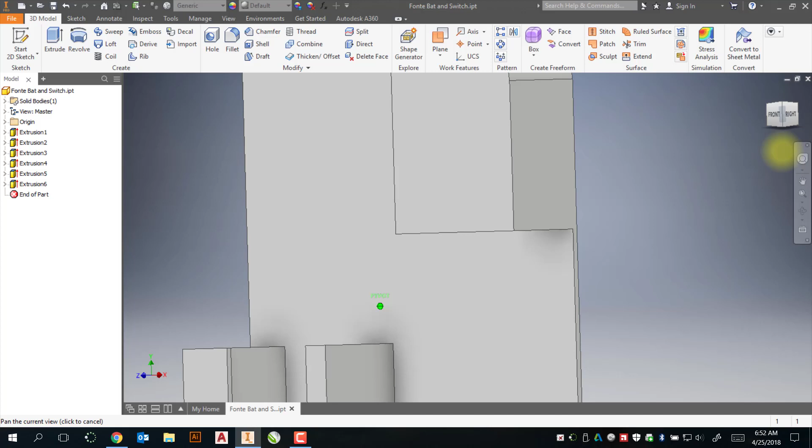So now I've got these all set. There's a couple things I want to do to this model before I send it to print. Right now I've got all this material over here and all this material down here. It's a lot of wasted material. So what I want to do is remove a lot of this material here. I'm going to create a little curve here and a little curve here.

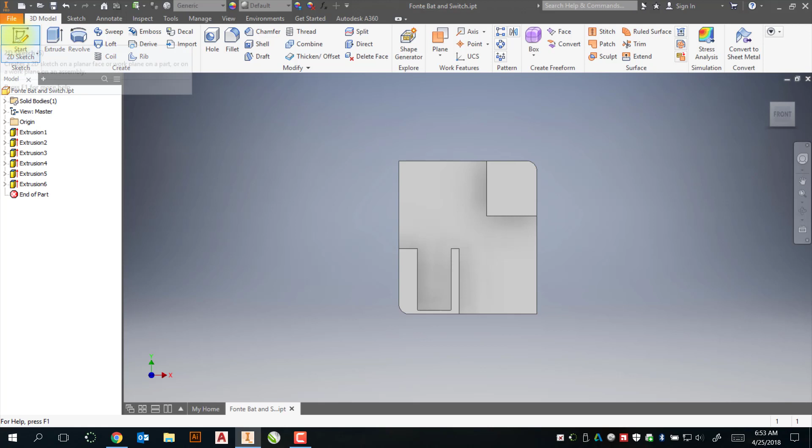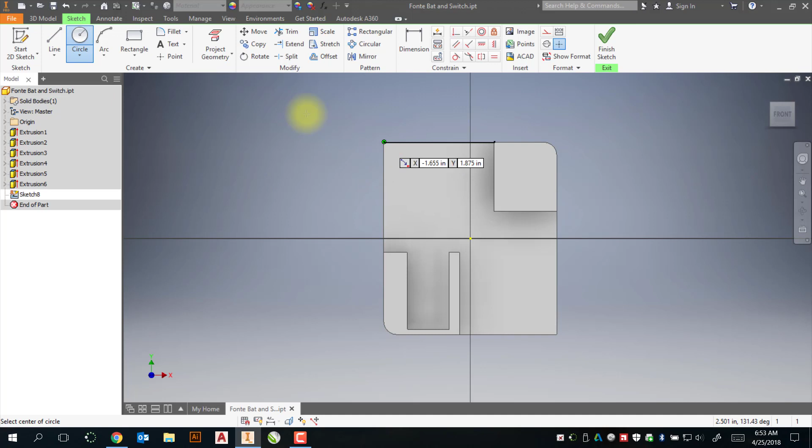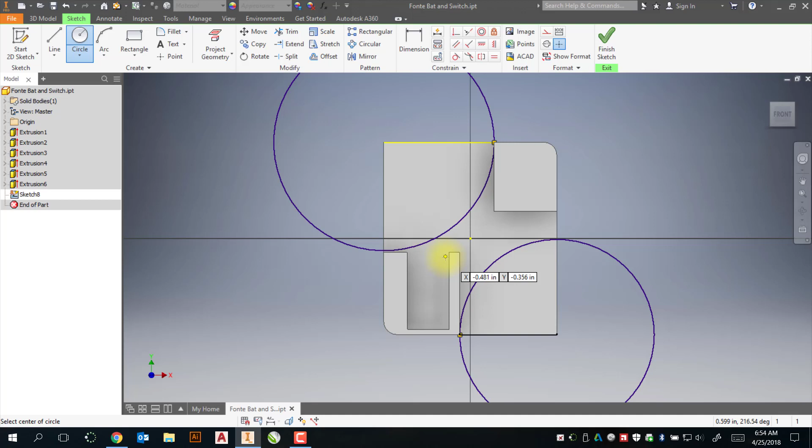To do that, I'm going to start a new sketch. I'm going to select this back face, click on that, and zoom in a tiny bit. I'm going to use the circle tool, go on the point right here, and draw a circle to this top corner right here and click. With the circle tool still selected, I'm going to do the same thing down here—click and drag this one right over to there and click. Now that I've got these two circles, I'm actually going to be removing this material.

So we're going to be doing the extrusion a little bit differently. We'll go ahead and click Finish Sketch. I'm going to rotate it just a little bit, just to make it look a little bit on an angle, so we have a little bit of a different view. So I'm going to click Extrude.

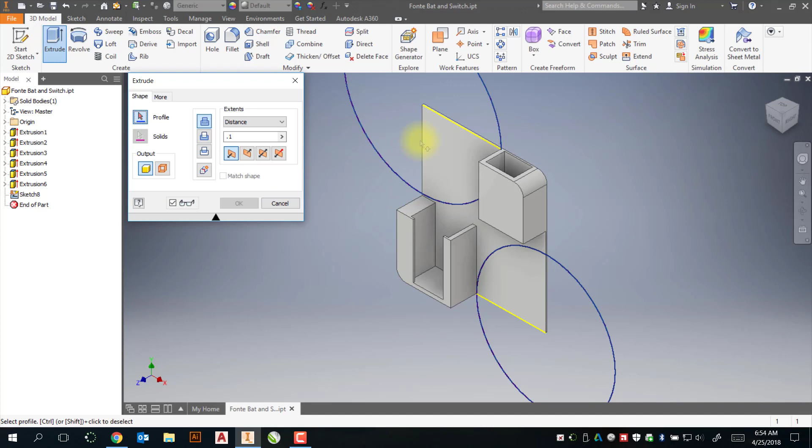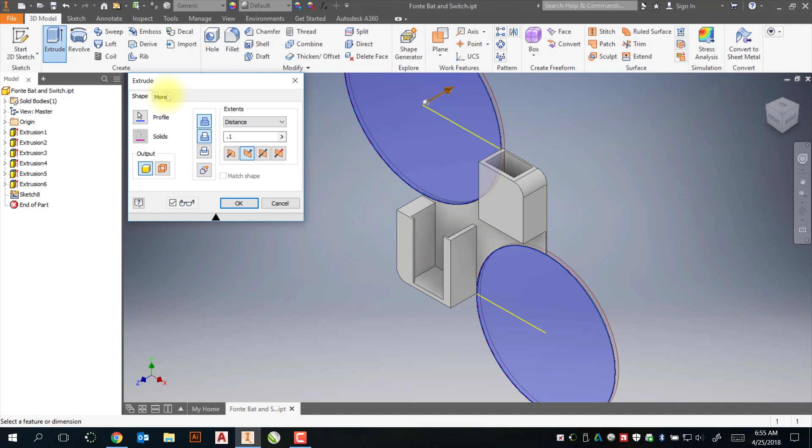I'm going to select the two faces that I want to extrude. Now you can see it's adding it on top, so what I want to do is click this here, direction 2, which reverses the direction. You can see it changed it from join to cut. If I were to click on join, it would basically join these two surfaces here. If I click on cut, it's actually removing, so I just want to make sure I have cut selected there.

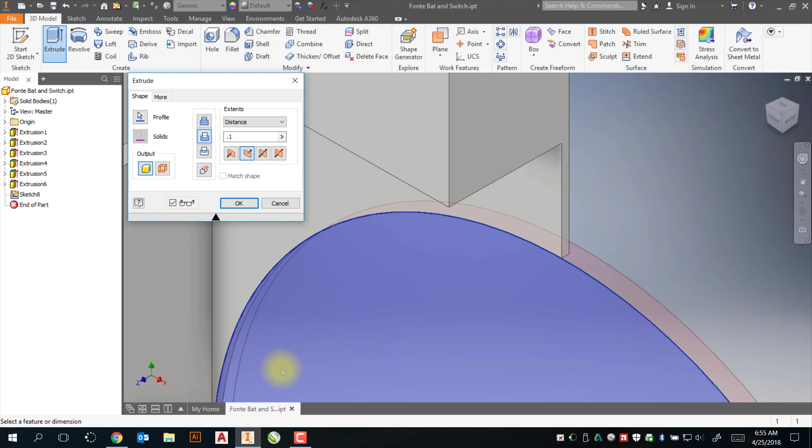The distance 0.1 is fine because remember the thickness of this back plate is 0.04, so anything that's 0.04 or greater will remove that material. 0.1 is fine because it's thicker than 0.04. I'm just going to go ahead and click OK. Now you can see it's removed that material.

So now I've got this. There's just a couple other things I want to do. A lot of these corners tend to be a little bit sharp, so I just want to round over some of these corners—this edge here, this bottom edge, this outside edge here. To do that, I'm going to use the fillet tool.

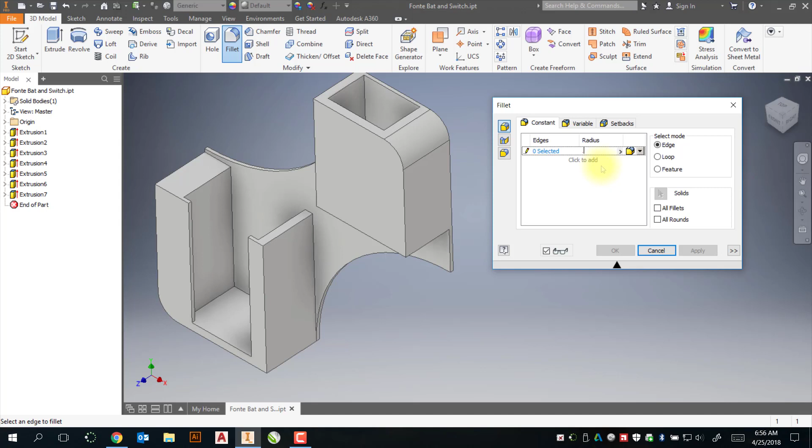Now I'm not in a sketch, so I'm going to be actually manipulating this model. I'm going to go ahead and select the fillet tool. This dialog box comes up—I'm just moving it over here so it's out of the way. The radius that I want to select is going to be 0.08.

There's just a couple areas I want to select. I want to select this bottom corner here, this outside edge, this outside edge, and this edge here. Now there's two other edges that I want to select.

What's neat about this is that I can actually select edges that are through the model, so you can see I can pick this line right here that's behind the model. I'm going to pick that one, and you can see that did that fillet going the opposite way. I'll see if I can rotate it just a little bit so you can see how it rotated that. Then I'm going to pick this one right in here—it's a little bit tough to pick. You can see how it did that round over right there.

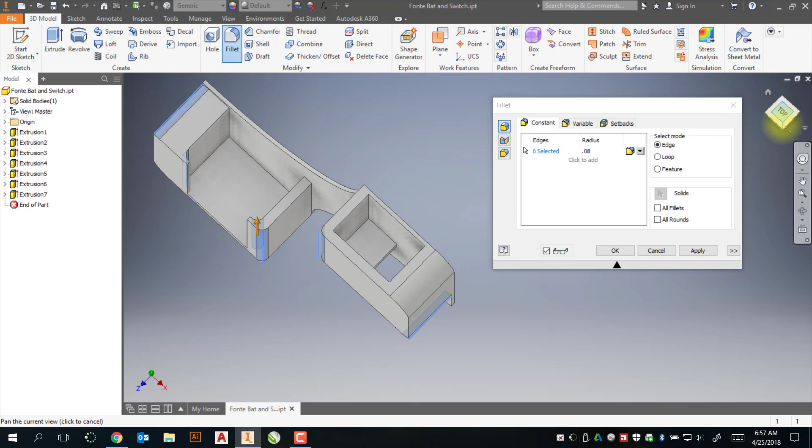So now I've got all of those—those are all the 0.08 radiuses that I wanted to round over. I'll pick this one right here as well, this little one, just to round it over so it's not sharp.

Now there is one other round over that I want to make, and that's going to be this one here, this edge right here. I do want to have this round, but I don't want to do it at 0.08. I actually want to do it at a larger round over. So I'm going to go ahead and click this here where it says click to add, so now I can add a different radius to a different line.

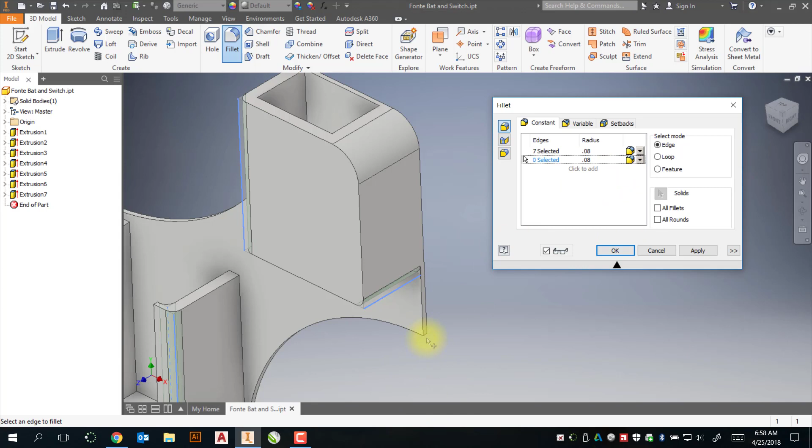I'm going to click on this little corner right here—I'm going to zoom in. This corner right here, you can see that did it at 0.08. Now what's neat is if I click and drag, I can move and adjust this radius. So I want to make this radius here, where I selected the one edge, I want to make that 0.625.

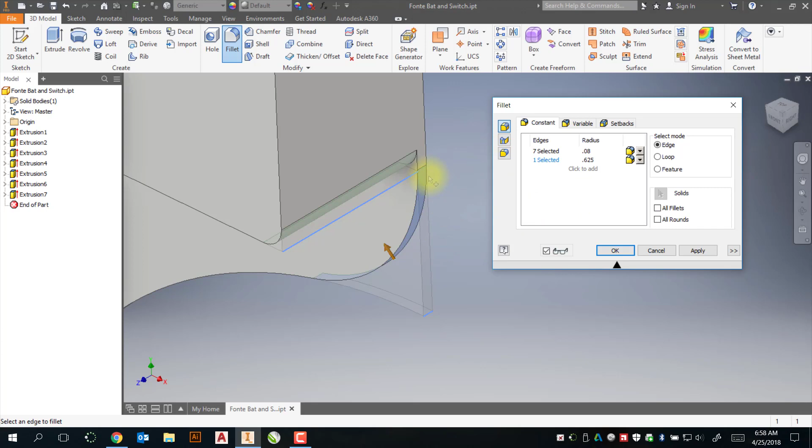Alright, so now you can see I got a nice radius on that. I've done all of my roundovers that I want, just to soften some of the edges so they're not super sharp. Now I can go ahead and click apply or OK.

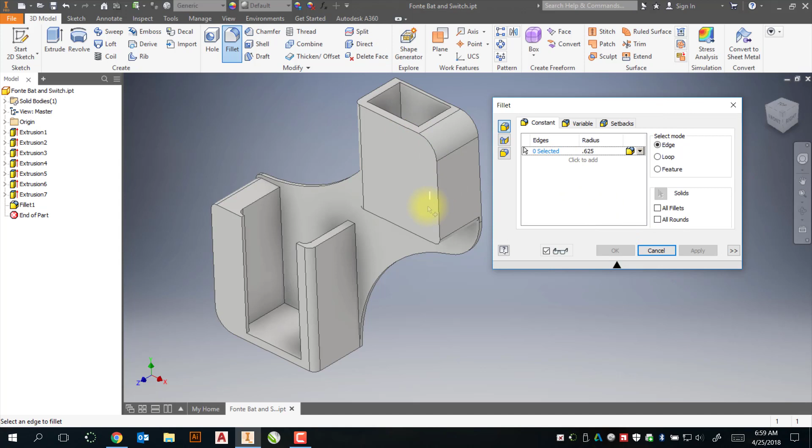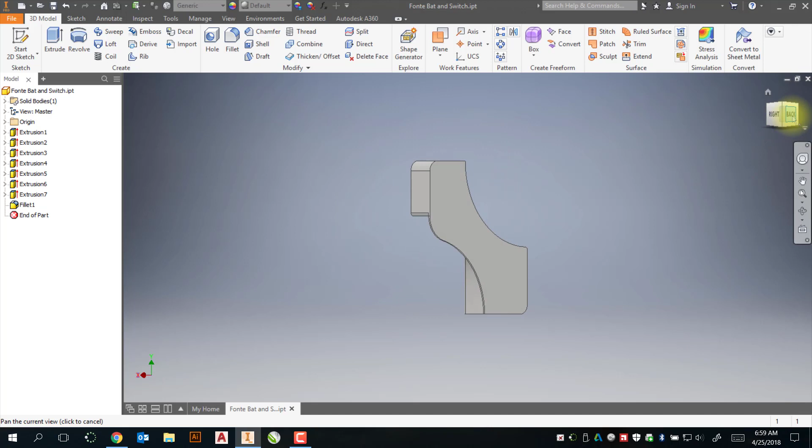I clicked apply, the window stayed up, so that's if I wanted to continue to select more I could. I'm just going to go ahead and click cancel because I did all of the radiuses I wanted to round over. So here's my model. Now there's one other thing I want to do — I want to rotate this model so I can see the back.

Because what we're going to do is we're going to be attaching, screwing this to the back of the nameplate, by running screws through the nameplate and into this back. So now I'm going to go over how we're going to do that.

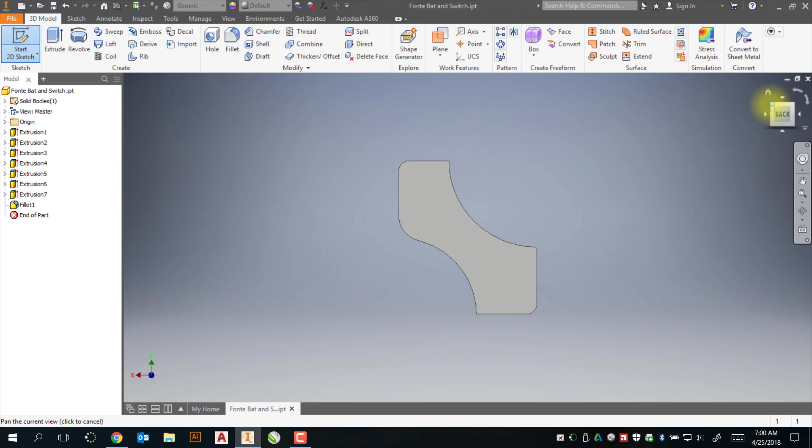Alright, so now we're going to add those 2 screw holes. To do that, just like all the other additions we made, we're going to start with a sketch. We're going to select this back face. I'm going to add a circle right on the center of this arc and right on the center of this arc.

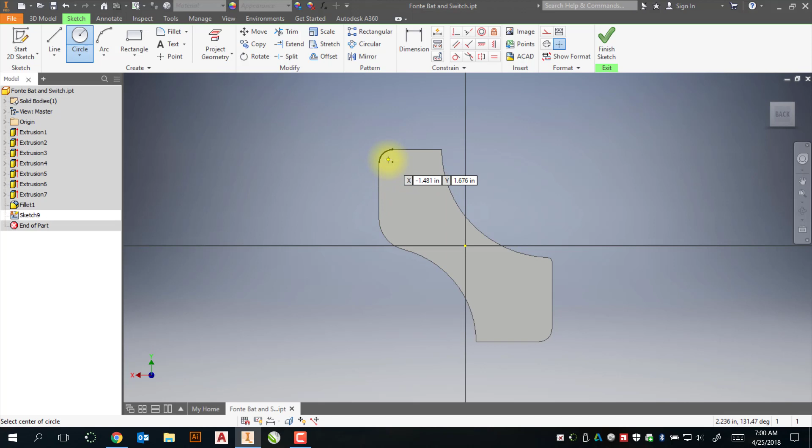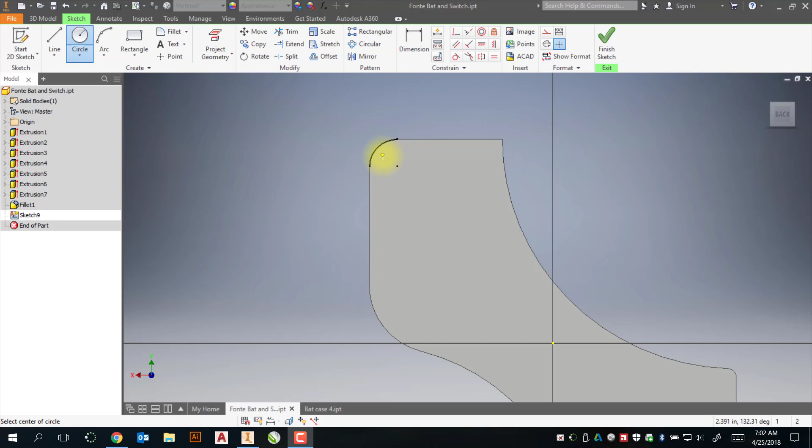So I'm going to use the circle tool, select that, and hover over this outside radius. Now you can see I have that center point. I'm going to click on that center point and start to drag this out. I'm going to select the center of this arc here, click, drag that out, and the dimension I want is 0.12. Click enter.

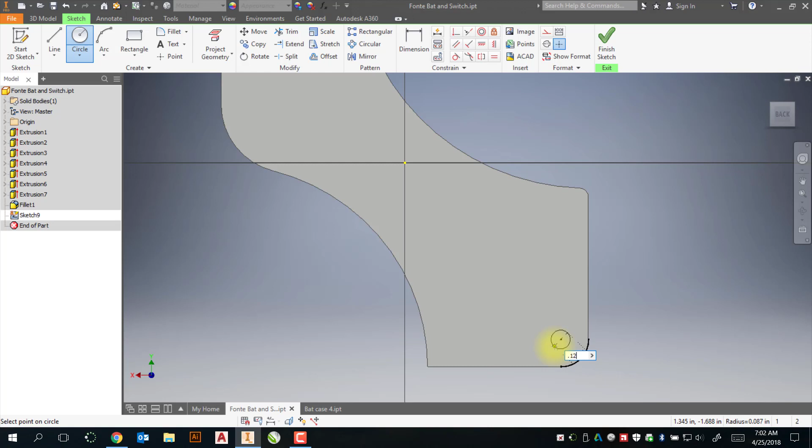Now I'm going to do the same thing down here. I still have the circle tool selected. 0.12, enter. So now that's all I need to do for these 2 circles. Click finish sketch. Again, extrude.

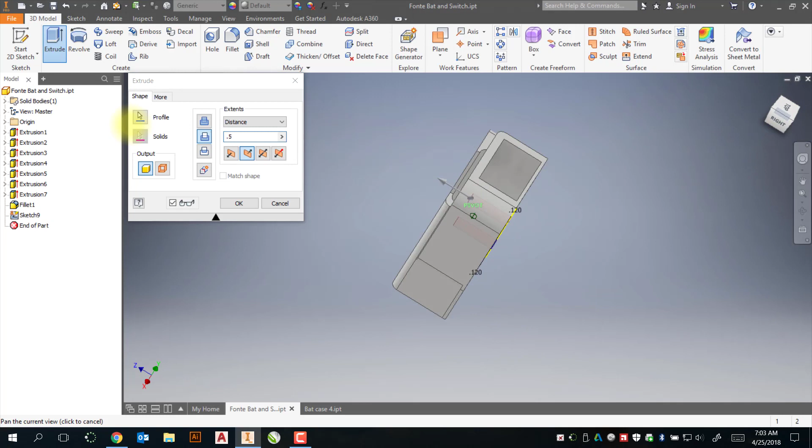I'm going to zoom in. I want to select these 2, and if you look, they're coming out, so I want to reverse direction. You can see it went to cut, and I want to change that distance to 0.5. That's going to make that nice hole in there for us to thread that bolt in.

Alright, so now I've got that there. I can go ahead and click OK.

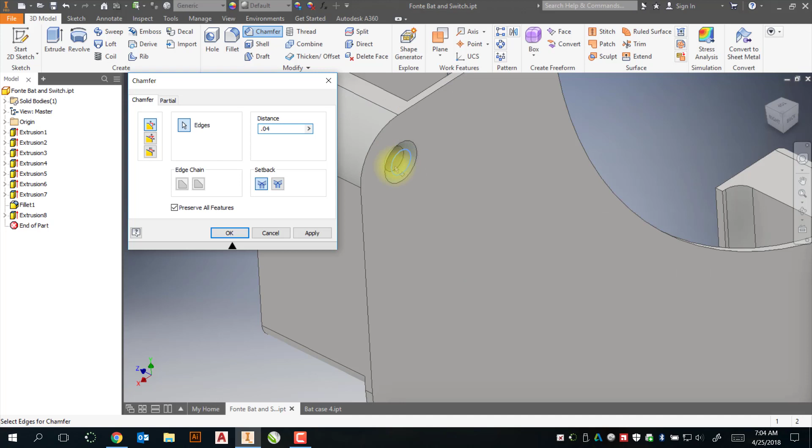Now the last thing I want to do is make this a little bit easier to get the screw in there. So I'm going to use this chamfer tool. I'm going to select these 2 circles that I just made, and I want to make this 0.08 — actually, let's do 0.04. It'll just add that little bit of an angle, just make it a little bit easier to attach this. I can go ahead and click OK once I've added that.

Now my part is all set. I just want to double check everything, make sure everything looks good. Next we're going to go over how to save this as a file that can be 3D printed.